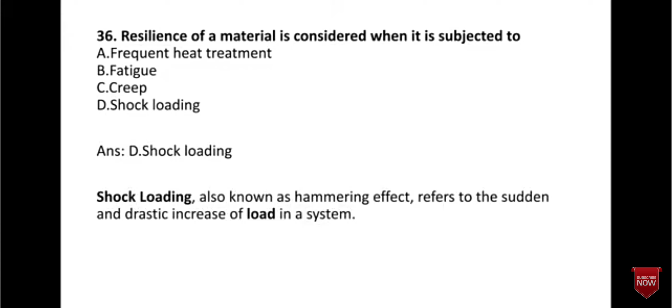Resilience of a material is considered when it is subjected to shock loading. Shock loading is also known as hammering effect, and it refers to the sudden and drastic increase of load in a system.

The total strain energy stored in a body is termed as resilience.

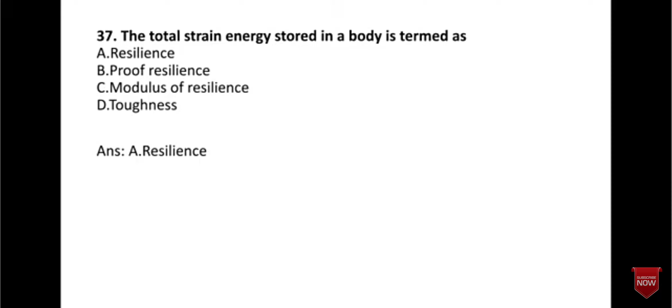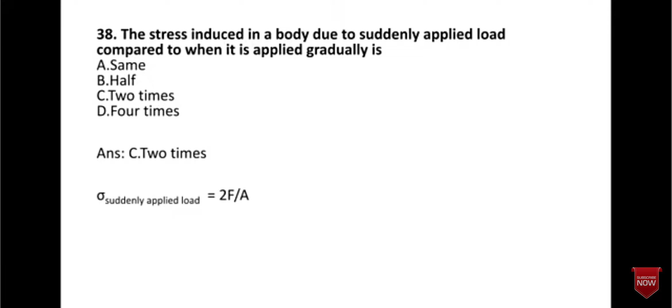The stress induced in a body due to suddenly applied load compared to when it is applied gradually is 2 times. So stress due to suddenly applied load is twice F upon A. If it is gradually applied, then it is F by A.

The strain energy stored in a body due to suddenly applied load compared to when it is applied gradually is 4 times. So stress is 2 times, whereas strain energy is 4 times.

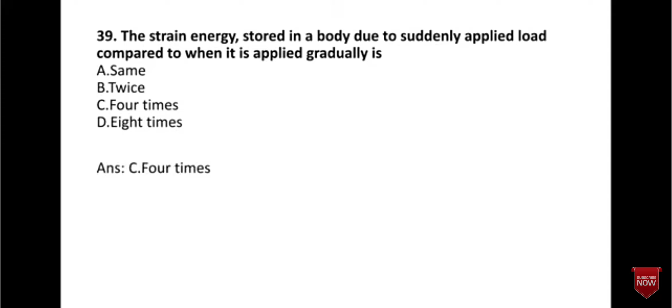A material capable of absorbing large amount of energy before fracture is known as toughness. So toughness is the ability of a material to absorb energy and plastically deform without fracturing.

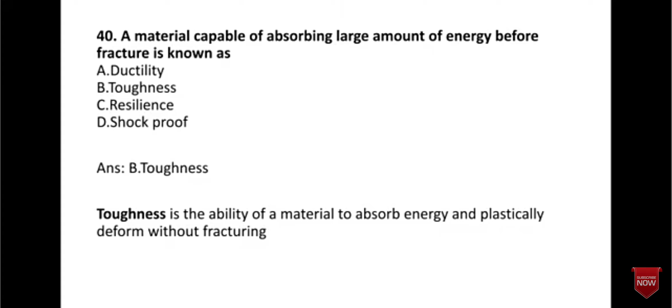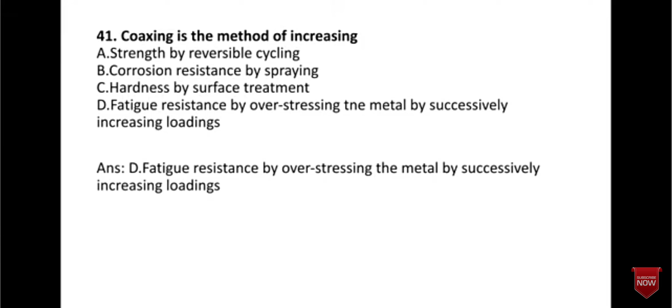Coaxing is a method of increasing fatigue resistance by overstressing the metal by successively increasing the loading.

A beam is loaded as a cantilever. If the load at the end is increased, the failure will occur at the support. So when the load applied at the end is increased, the failure will occur at the support only.

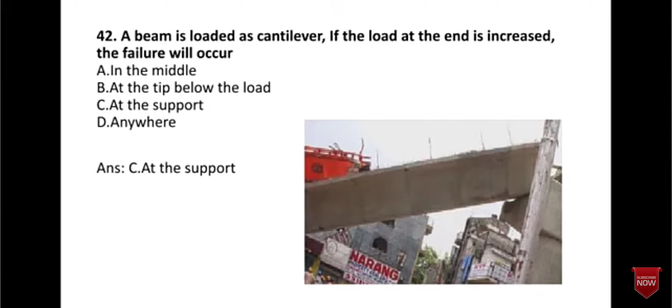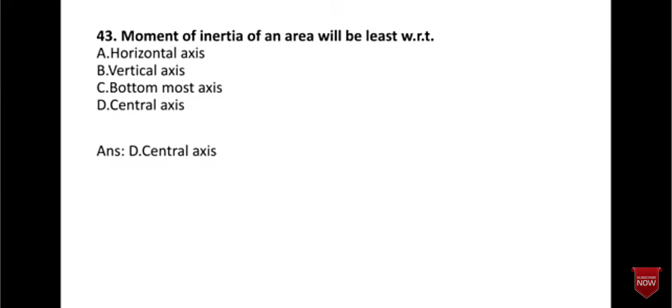Moment of inertia of an area will be least with respect to the central axis.

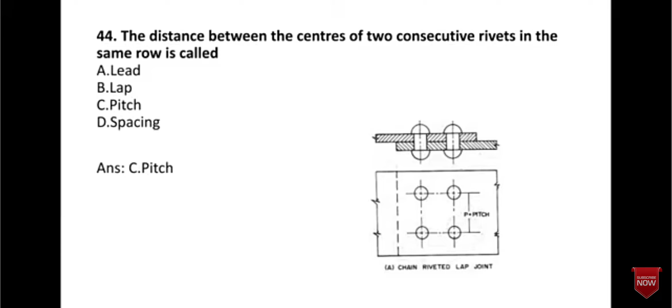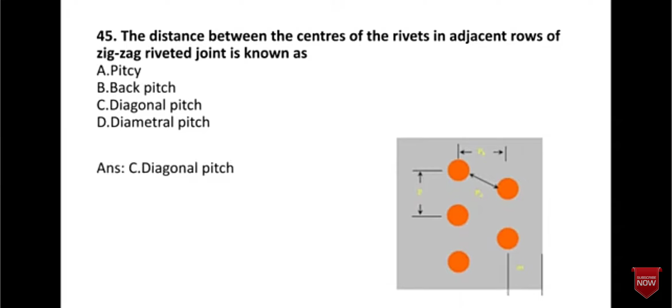The distance between the center of the rivet in adjacent rows of zigzag riveted joint is known as diagonal pitch, denoted by PD.

Efficiency of a rivet joint is the ratio of its strength to the strength of unpunched plate in tension. Whenever the efficiency of a riveted joint is calculated, it is loaded under tension. So the efficiency is equal to the least of PS, PB or PT divided by strength of the solid plate, multiplied by 100. The plate is considered in tension and then its efficiency is calculated.

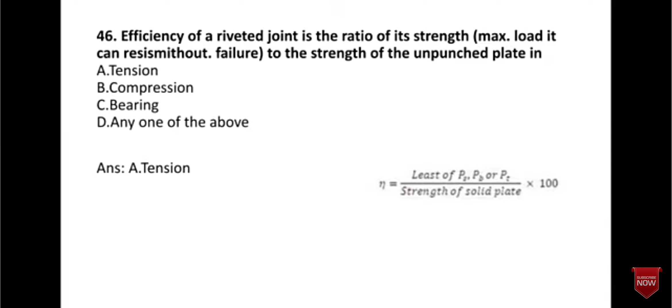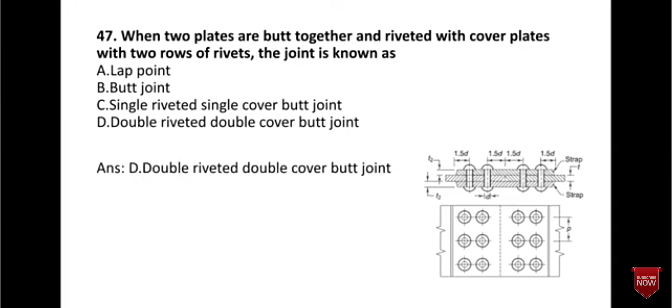When the two plates are butt together and riveted with cover plates with two rows of rivets, the joint is known as double riveted double cover butt joint.

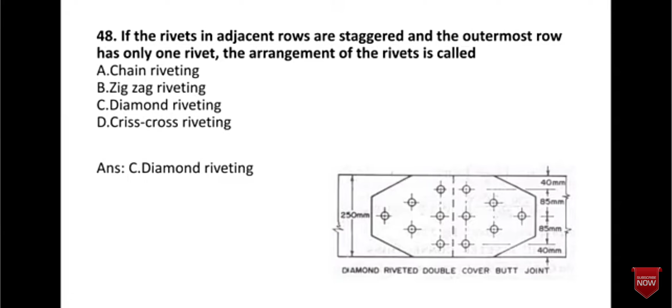If the rivets in adjacent rows are staggered and the outermost row has only one rivet, the arrangement of the rivet is called diamond riveting. The outermost row has only one rivet; such an arrangement is known as diamond riveting.

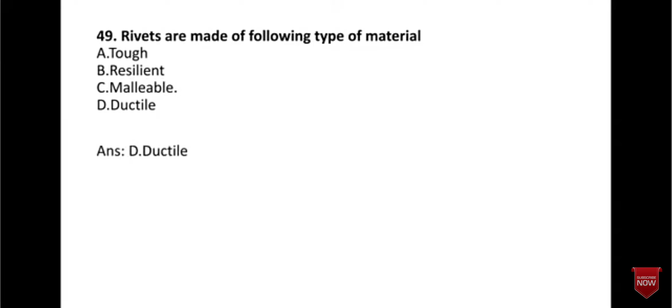Rivets are made up of ductile material. Rivets are always made up of a ductile material.

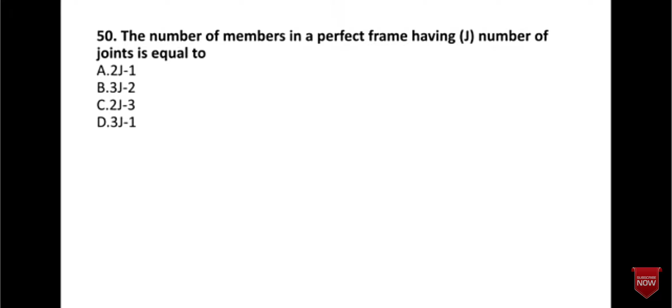The number of members in a perfect frame having j number of joints is equal to 2j minus 3.

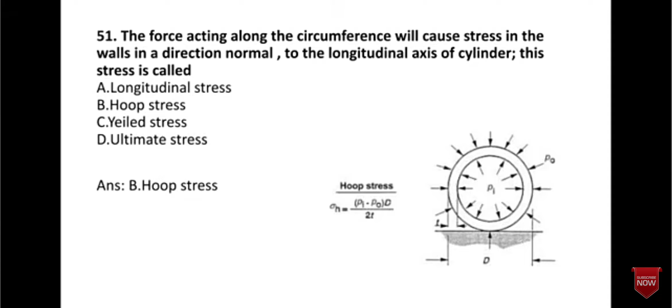Longitudinal stress in a thin cylinder is half of the hoop stress. In case of a cylinder it is half, and in case of a sphere the formula is PD divided by 4T.

The radius taken into consideration in calculating the stress in a hollow shaft subjected to torsion is the outer radius. The outer radius is taken into consideration in calculating the stress in a hollow shaft when it is subjected to torsion.

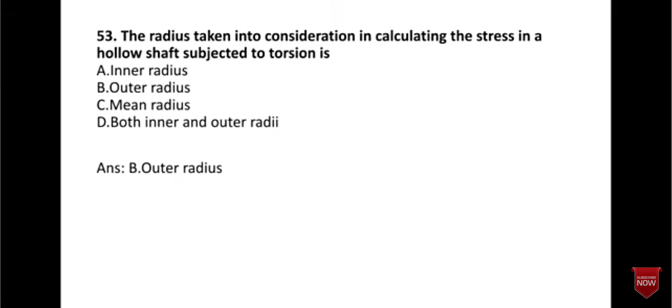A key is subjected to the sidewall pressure as well as shearing forces. This pressure is called bearing stresses.

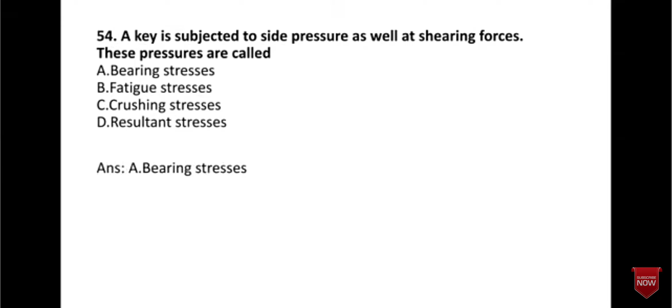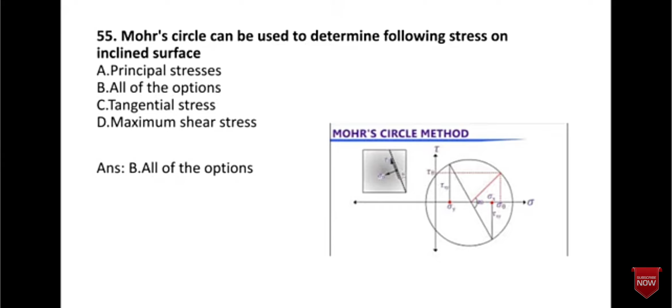Mohr circle can be used to determine following stress on the inclined surface: principal stress, tangential stress, maximum shear stress, or all of the options. The answer is all of the options. So Mohr circle can be used to determine the principal stress, tangential stress, and the maximum shear stress.

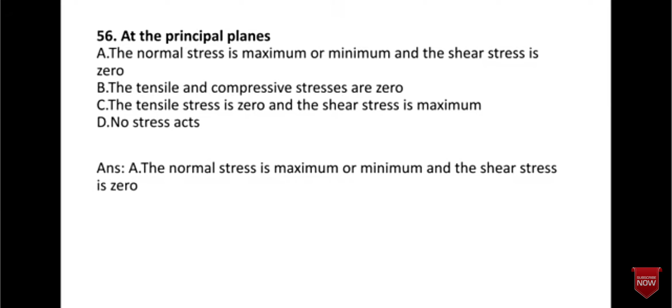At the principal planes, the normal stress is maximum or minimum and the shear stress is 0. So always at a principal plane, the normal stress is maximum or minimum and the shear stress is 0.

A structural member subjected to an axial compressive force is called a strut. Here you can see this is nothing but the suspension system, that is an example of strut, and it is subjected to the compressive force.

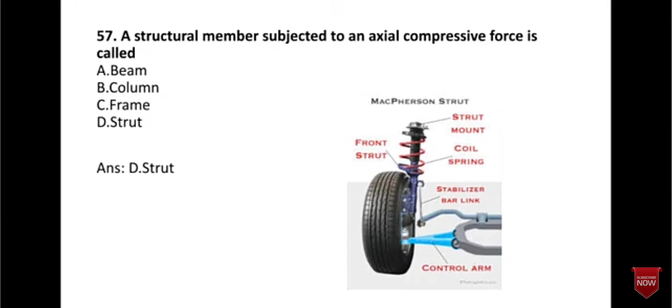If the section modulus of a beam decreases, the bending stress will increase. So if the section modulus of the beam decreases, the bending stress will increase.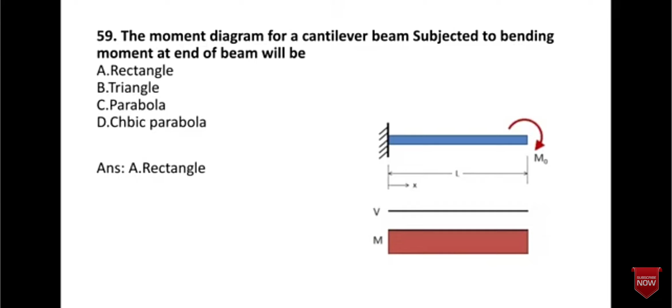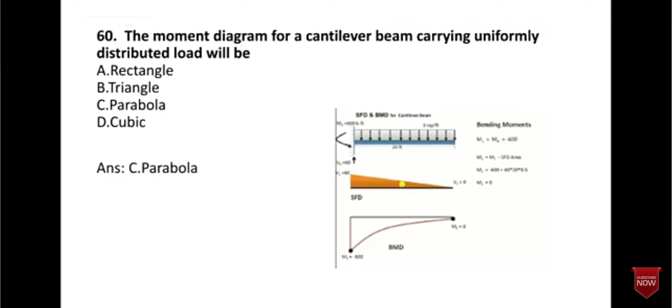The moment diagram for a cantilever beam carrying uniformly distributed load will be: here you can see the uniformly distributed beam. It is a cantilever beam loaded with uniformly distributed load, and the moment diagram is in parabola shape. The answer is parabola - the bottommost diagram is in parabola shape.

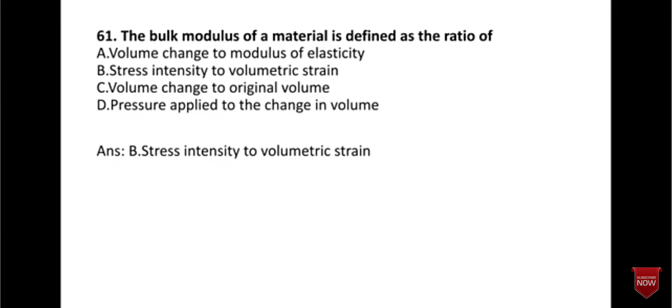The bulk modulus of a material is defined as the ratio of stress intensity to the volumetric strain, that is known as the bulk modulus of the material.

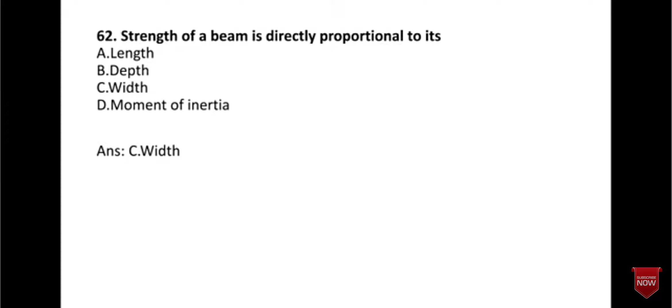Strength of the beam is directly proportional to its width. So the strength of the beam is directly proportional to its width.

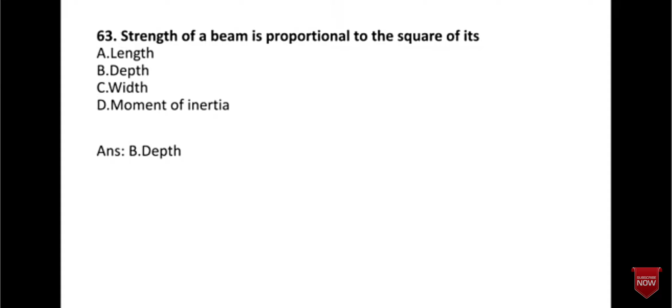The point of contraflexure is nothing but a point where bending moment changes its sign. In the bottommost diagram you can see the bending moment changing its sign. So the point at which the bending moment changes its sign is known as the point of contraflexure.

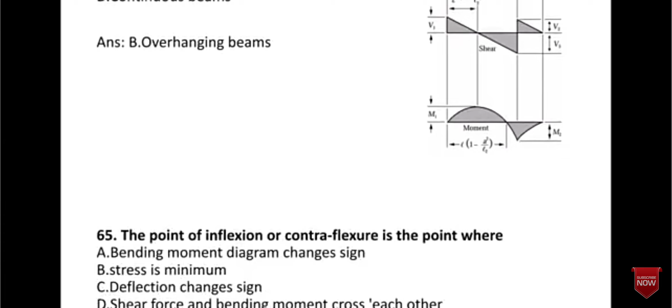The point of contraflexure is the point where the bending moment diagram changes the sign. Whenever the bending moment diagram changes the sign, that point is known as the point of contraflexure.

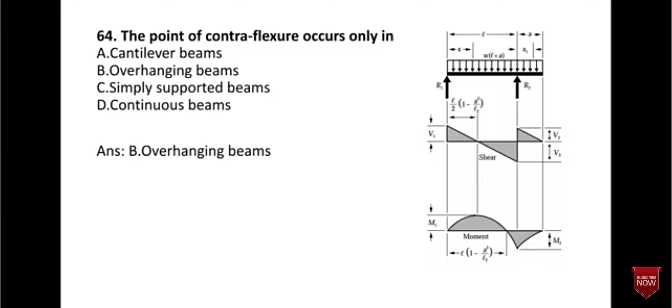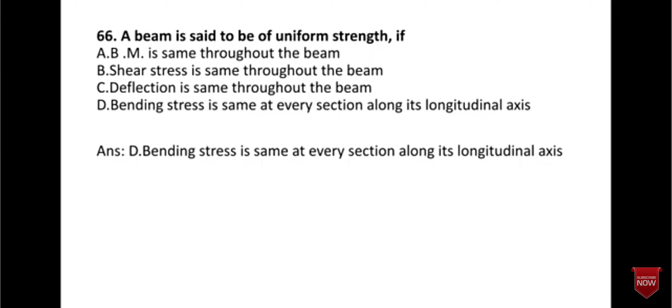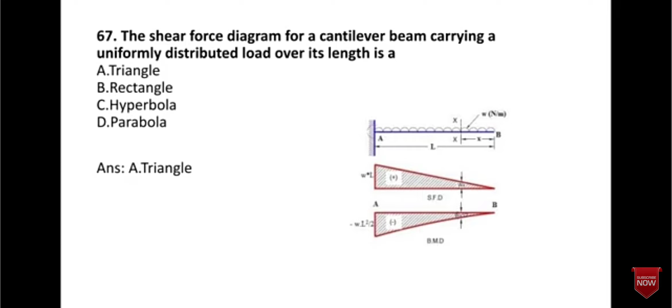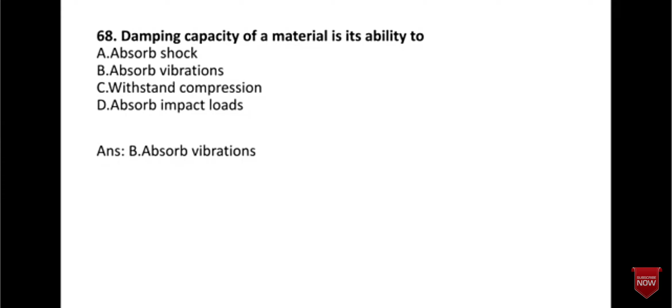Damping capacity of the material is its ability to absorb the vibration. So the damping capacity of a material is its ability to absorb the vibrations.

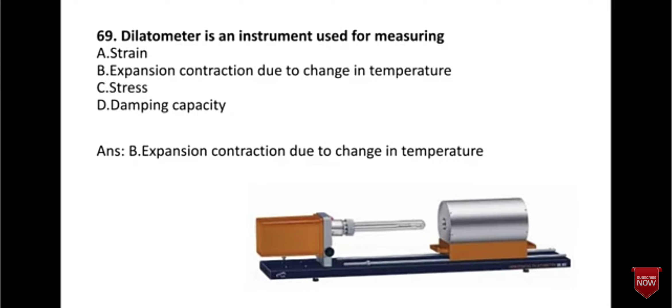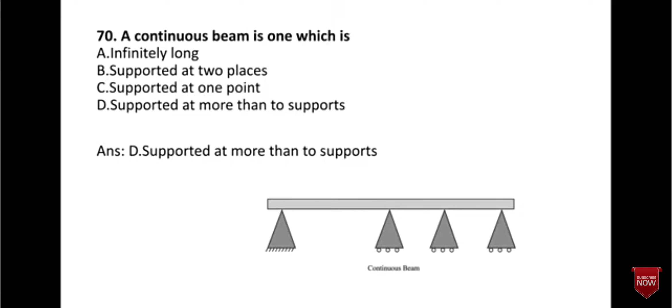So these are nothing but some objective questions which are commonly asked in various competitive examinations.